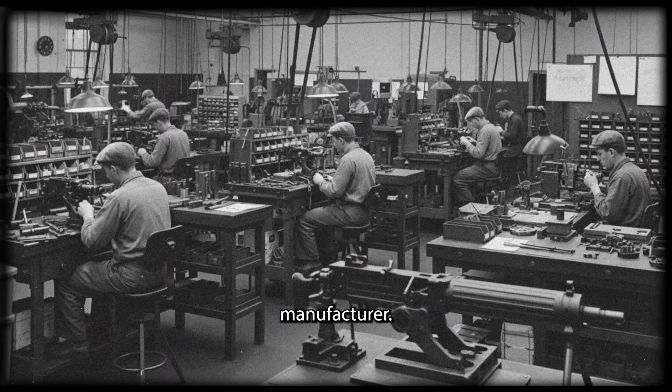What neither general knew that August was that the solution wouldn't come from a military arsenal or a traditional firearms manufacturer. It would come from a company whose engineers spent their days designing refrigerators and freezers, not weapons of war. The breakthrough was about to emerge from the most unlikely of places, Dayton, Ohio, at the Frigidaire division of General Motors.

August 1943. Frigidaire Division, General Motors, Dayton, Ohio. The Frigidaire plant in Dayton had already been transformed by war. The assembly lines that once produced refrigerators and freezers for American households now hummed with military production. Like many American manufacturers, Frigidaire had converted its civilian expertise to the war effort. The company was already manufacturing the standard M2 .50 caliber Browning machine gun, one of 4 General Motors subsidiaries producing the weapon that armed American fighters and bombers.

But the Ordnance Department wanted more than manufacturing capacity. They wanted innovation. The contract arrived in August 1943, and it was different from anything Frigidaire had received before. This wasn't simply an order to produce existing weapons. This was a development contract, a challenge to solve the problem that had defeated Springfield Armory, Colt, and High Standard. The Army needed a high-speed .50 caliber machine gun, and they were willing to try an unconventional approach.

What made this contract remarkable was what it didn't say. The Ordnance Department, frustrated by years of failed attempts to modify the existing M2 design, made a critical decision. They placed no restrictions on the number of changes Frigidaire could make to the weapon. The engineers were free to redesign, reimagine, and rebuild whatever was necessary.

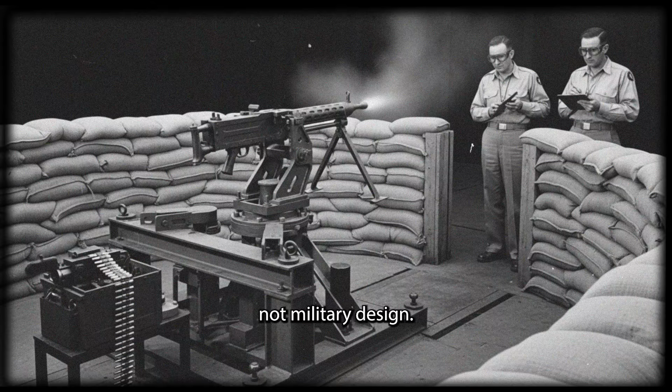For the Frigidaire engineers, this was unfamiliar territory. They were mechanical engineers, certainly, men who understood precision manufacturing, metallurgy, heat dissipation, and stress analysis. But their reference points were compressors and cooling systems, not firearms. They came from a civilian manufacturing background, not military design. They hadn't spent careers studying ballistics and recoil systems. Yet perhaps that was exactly what the project needed.

The team at Frigidaire began where traditional firearms engineers had failed. They didn't start by asking how to make the M2 fire faster. They started by studying why it failed when pushed beyond its design limits. Initial experiments focused on modifying the standard M2 with an air buffer and a redesigned backplate buffer, slightly longer than the standard model. Neither device achieved the desired result. The fundamental problem remained. The architecture of the M2 couldn't handle the increased forces.

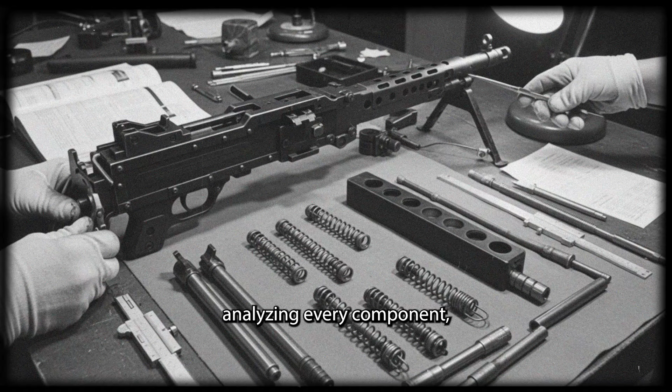So they went deeper. If the existing design couldn't be fixed, it would have to be rebuilt from the ground up. The engineers began analyzing every component, every stress point, every source of friction and heat. They approached the weapon the way they might approach a failing refrigeration system, methodically identifying failure points and redesigning around them.

By March 1944, Frigidaire had produced their first prototype, the T-25. The weapon incorporated several innovative features. The backplate buffer was completely redesigned, with springs incorporated into the design. The breech-lock depressors, previously located on the oil buffer housing, were relocated to the receiver walls. A muzzle booster was added to help increase the cyclic rate.

The gun looked promising. But when the Ordnance Department tested the T-25, it revealed the same pattern that had plagued the High Standard prototypes. The gun was relatively successful, but further development work was clearly needed. The team immediately began work on an improved version, the T-25E1.

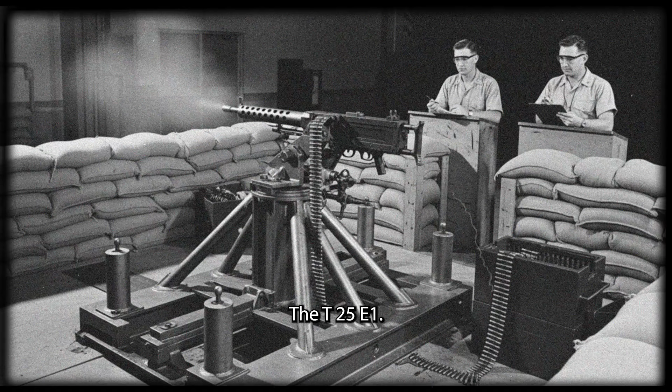On May 10, 1944, the T-25E1 underwent testing at Aberdeen Proving Ground, the Army's primary weapons testing facility. The engineers watched as their weapon was put through its paces. It didn't take long for the problems to emerge. Numerous stoppages, parts failures. The testing was stopped before completion. For a less determined team, this might have been demoralizing.

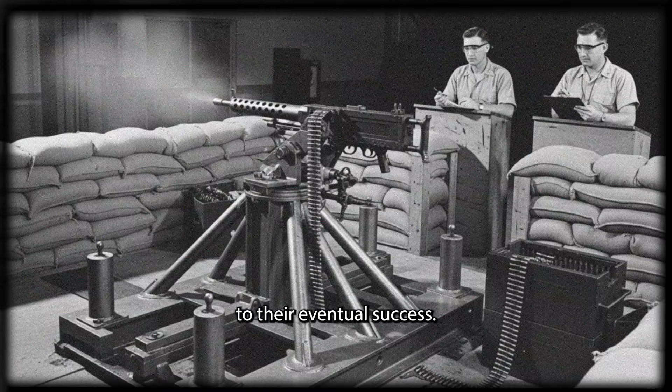They were competing against the combined expertise of America's premier military arsenals and established firearms manufacturers, and failing by the same metrics. But the Frigidaire engineers did something that would prove critical to their eventual success. They learned from everyone else's failures. The next prototype, designated T-25E2, took the best features from all the previous attempts, not just their own work, but innovations from the High Standard T-22E6 weapon as well. The engineers weren't bound by institutional pride or manufacturing traditions. They were problem solvers, and they'd take good ideas wherever they could find them.

The T-25E2 was tested in June 1944. Initial results seemed better, but functioning problems appeared immediately. After only 1,800 rounds, the test was stopped. The gun still wasn't ready. But something had changed in the approach. With each iteration, the Frigidaire team was getting closer to understanding the fundamental challenge. They weren't just trying to make an existing gun fire faster. They were creating something new, a weapon that would look like a Browning M2 from the outside, but would be almost entirely different beneath the surface.

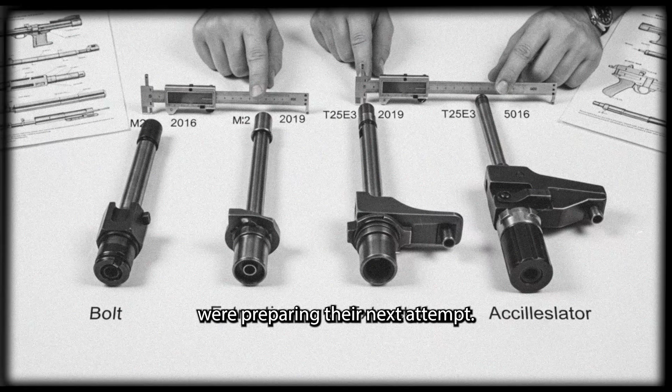By summer 1944, as Allied forces pushed inland from the Normandy beaches and American bombers continued their relentless campaign over Germany, the pressure for a solution had never been greater. The Messerschmitt jets were appearing in increasing numbers. Pilots needed that faster gun. In Dayton, the Frigidaire engineers were preparing their next attempt. They designated it the T-25E3. This time, they believed, would be different.

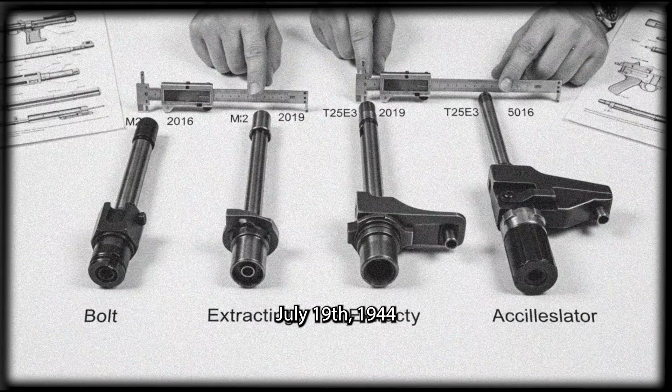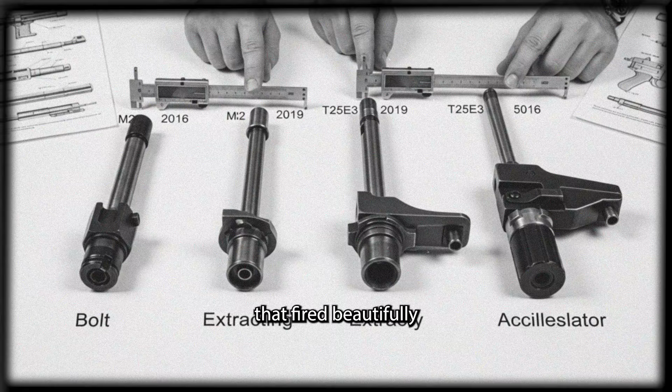July 19, 1944. Aberdeen Proving Ground, Maryland. The T-25E3 arrived for testing with little fanfare. It was another experimental high-speed machine gun, joining a long list of prototypes that had promised much and delivered disappointment. The weapons testers at Aberdeen had seen this story before. Guns that looked good on paper, that incorporated clever engineering solutions, that fired beautifully for the first few hundred rounds, and then began to shake themselves apart. But the Frigidaire engineers knew something was different this time.

The T-25E3 represented a fundamental reimagining of the Browning design. They had taken the best features from the High Standard T-22E6 prototype and combined them with their own innovations. The result was essentially a new weapon. From the exterior, it looked like a standard Browning M2. The overall dimensions were the same, the mounting points identical, critical factors for retrofitting existing aircraft. But internally, almost nothing was interchangeable with the M2. The engineering changes were comprehensive and precisely targeted at the stress points that had destroyed previous high-speed prototypes.

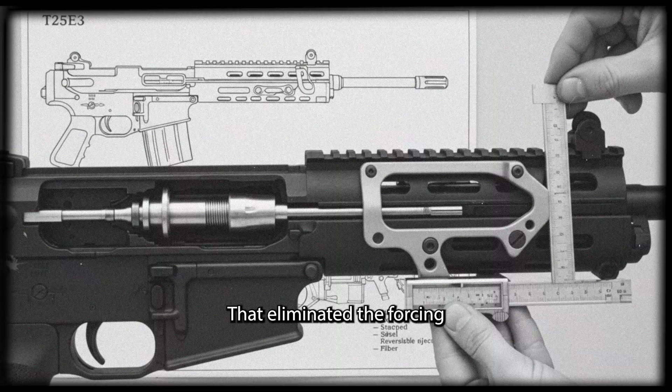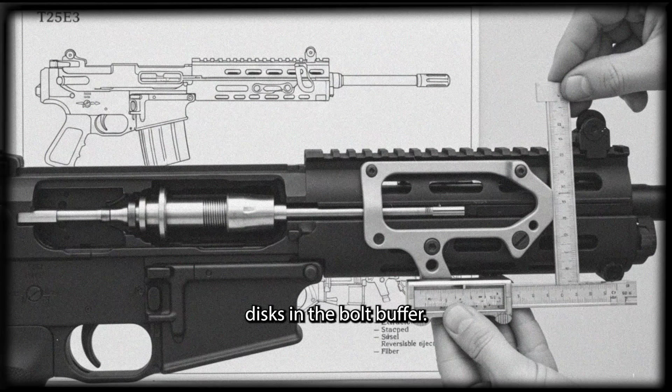The bolt had been completely redesigned using advanced metallurgy. Lighter, stronger, faster. That eliminated the forcing of the ejector between cartridges in the ammunition belt, a seemingly small change that dramatically improved reliability in cramped aircraft installations where belts could twist and bind. The accelerator mechanism had been reimagined to make more effective use of the barrel's energy, increasing the bolt's speed during the firing cycle. Where previous designs had used fiber discs in the bolt buffer, the T-25E3 employed a Belleville spring design, cupped steel washers that returned more energy to the bolt, increasing the force of its counter-recoil and contributing directly to the higher cyclical rate.

One of the most persistent problems in high-speed gun development had been backplate failures. Under the tremendous forces generated by rapid fire, the backplate at the rear of the receiver would crack and fail. The Frigidaire solution was elegant. They redesigned the backplate to clamp around the receiver, preventing the spreading of the receiver's side plates that had been causing the failures. The breech-lock depressors were rigidly mounted to the receiver's side plates by riveting, preventing the buffer body from moving and improving the stability of other components. Even the breech lock itself had been refined, with a redesigned cam surface for smoother operation.

The extractor cam was made substantially larger than that used on the M2. The top cover was redesigned to increase feed lift, incorporating a feed pawl shaped to fit the cartridge and link, along with a strengthened belt feed lever. A split belt holding pawl was added to improve ammunition feeding in confined installations. And there was the muzzle booster, a device that would help push the cyclical rate past the critical 1,000 rounds per minute threshold. The Aberdeen test officers loaded standard ammunition and standard links into the T-25E3. No special components, no hand-selected cartridges. If this gun was going to work, it had to work with the same ammunition every other weapon used.

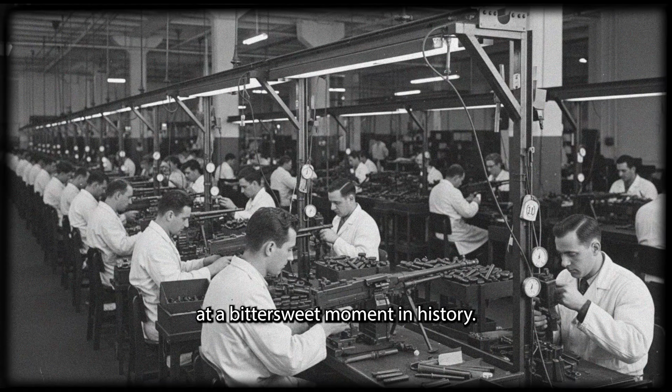But the M3 arrived at a bittersweet moment in history. Only 2,400 of the guns were procured before World War II ended in September 1945. The weapon that pilots had desperately needed in 1943, that could have changed the calculus of countless air battles over Germany and Japan, came too late to make a significant impact on the war that had driven its development.

Germany surrendered on May 8, 1945, just weeks after the M3's official adoption. Japan surrendered on August 15, following the atomic bombings of Hiroshima and Nagasaki. The war was over. The massive military production machine that had consumed American industry ground to a halt. Contracts were canceled, plants converted back to civilian production. At Frigidaire, the engineers who had solved the impossible problem returned to designing refrigerators and freezers.

The M3 might have become a historical footnote, an engineering triumph that arrived too late, except that the peace didn't last. On June 25, 1950, North Korean forces crossed the 38th parallel, invading South Korea. The United States, under UN authority, committed forces to defend South Korea. American aircraft, many of them propeller-driven fighters left over from World War II, again needed the most effective weapons available.

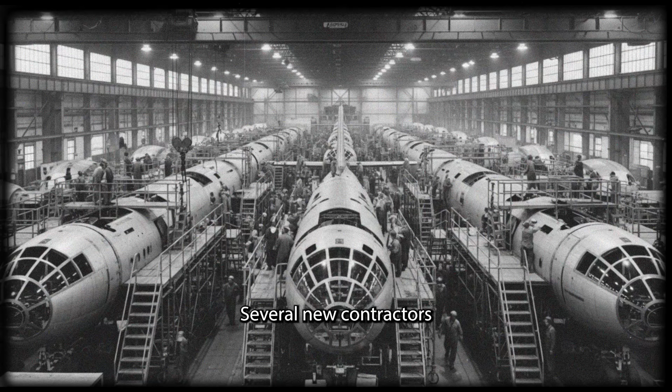The M3 machine gun was pulled from storage and put back into production. Several new contractors began manufacturing the weapon. The guns were installed on F-51 Mustangs, F4U Corsairs, and other aircraft flying combat missions over Korea. The M3 finally got its war. Pilots found that the increased rate of fire gave them a decisive advantage in the brief, violent engagements that characterized air combat over the Korean peninsula.

The weapon performed as designed, delivering the firepower that the Army Air Forces had demanded back in 1943. But the extended combat use in Korea revealed a troubling pattern. Despite all the improvements in design and metallurgy that Frigidaire had implemented, despite the careful engineering that had solved so many of the problems that plagued earlier high-speed prototypes, the M3 had a malfunction and failure rate that proved unacceptable for sustained service. The weapon was pushed beyond its limits in Korea, firing burst after burst in combat conditions far more demanding than any testing program could simulate.

Sears broke, bolts cracked, other parts failed under the relentless stress of sustained high-speed fire. The same fundamental problem that had destroyed the Colt M2E1 in 1940 and the High Standard T-22 series prototypes in 1942 and 1943 was still present, just pushed further back. The M3 had extended the boundaries of what was possible with a .50 caliber machine gun, but it hadn't eliminated the basic physics of the problem. The cartridge was simply too powerful, the forces too extreme for any mechanical system to handle indefinitely at those cyclic rates.

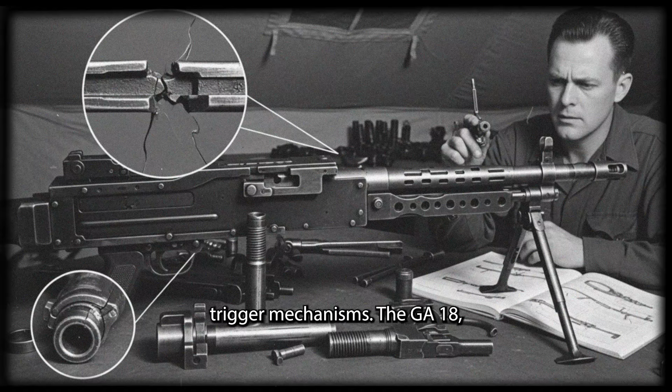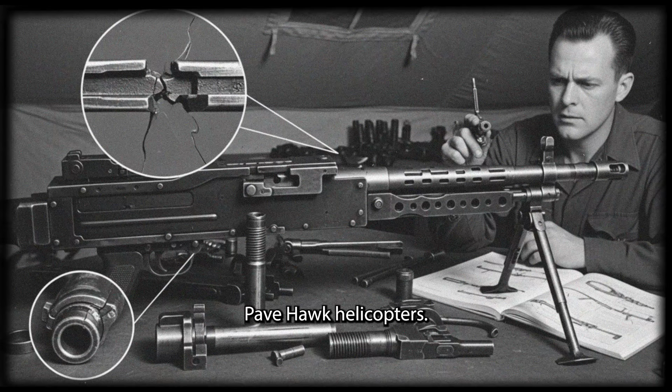The GAU-16/A featured improved trigger mechanisms. The GAU-18/A, formerly designated M218, was a lightweight variant used on Air Force MH-53J Pave Low III and HH-60 Pave Hawk helicopters. All of these were based on the standard M2 design, with cyclic rates in the 750 to 850 rounds per minute range. Reliable, proven, effective for their intended roles.

But they weren't the super-fast gun that the Frigidaire engineers had created. Then, in the late 20th century, someone looked at the old M3 design with fresh eyes and new technologies. The fundamental concept that the Frigidaire team had proven in 1944 was sound. A high-speed 50-caliber machine gun could deliver dramatically superior firepower.

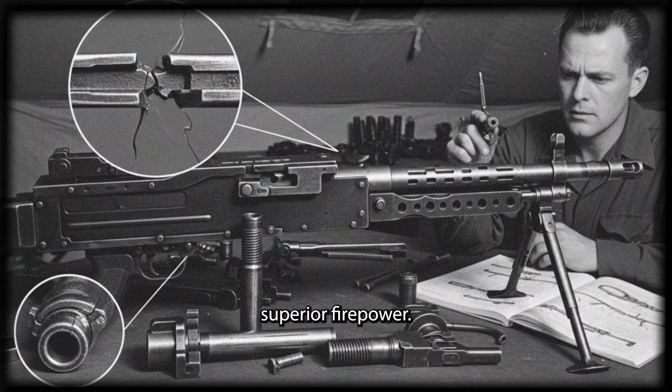The problem was materials and metallurgy. The M3 had pushed 1940s manufacturing technology to its limits and slightly beyond. But by the 1990s and early 2000s, material science had advanced considerably. High-grade alloy metals, improved heat-treating methods, and manufacturing tolerances that would have been impossible in 1944 were now standard. Engineers redesigned the M3 series using these modern capabilities.

The most obvious mechanical change was reconfiguring the weapon's operating system to fire from the open bolt position. This permitted the weapon to be fired in longer bursts without the danger of overheating and causing a cook-off, when residual heat in the chamber ignites a chambered round without the trigger being pulled. The result was the M3P model, a fixed, remote solenoid-fired version.

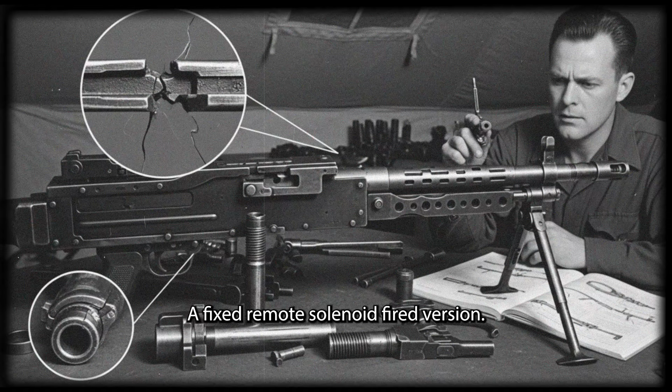The weapon measured 66.14 inches in overall length with an unmounted weight of 80.25 pounds. The barrel length was 35.2 inches. And the cyclic rate, the number that had driven the entire development program back in 1943, was 950 to 1,100 rounds per minute. Not quite the 1,250 rounds per minute of the original M3, but far faster than the standard M2, and with reliability that the 1945 version could never achieve.

The M3P was deployed on the AN/TWQ-1 Avenger air defense system and some versions of the UH-60 Black Hawk helicopters. The Avenger system used the M3P to cover the missile dead zone and engage ground targets. The machine gun was mounted on the right launch beam with its ammunition magazine fixed on the right side of the turret, carrying 250 to 400 rounds of 12.7mm ammunition.

Routine maintenance procedures included scheduled replacement of selected high-stress parts to ensure system reliability, a recognition that even with modern materials, a high-speed 50-caliber gun required careful maintenance. In 2004, another variant was adopted, the M3M flexible machine gun, designated as the GAU-21/A by the U.S. Air Force and Navy.

This version was designed for pintle soft mount applications on helicopters and fixed-wing aircraft, and could also be mounted in vehicles. The weapon measured 59.8 inches overall, weighed 78.9 pounds, and had a barrel length of 36 inches. Its maximum cyclic rate was 1,100 rounds per minute, firing from a closed bolt position. The M3M was marketed as a complete weapon system consisting of 3 parts: the weapon itself, a medium pintle head soft mount, and a cradle used to integrate the system into a vehicle or aircraft.

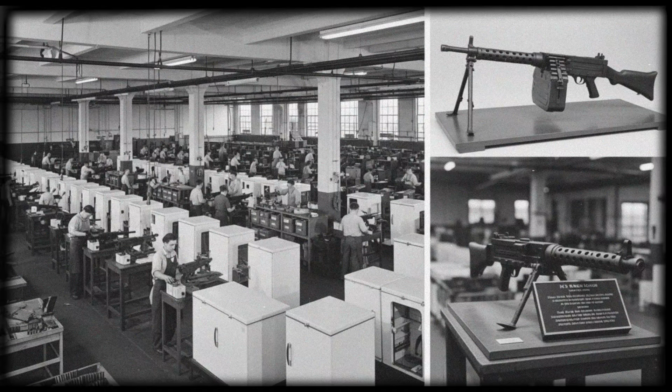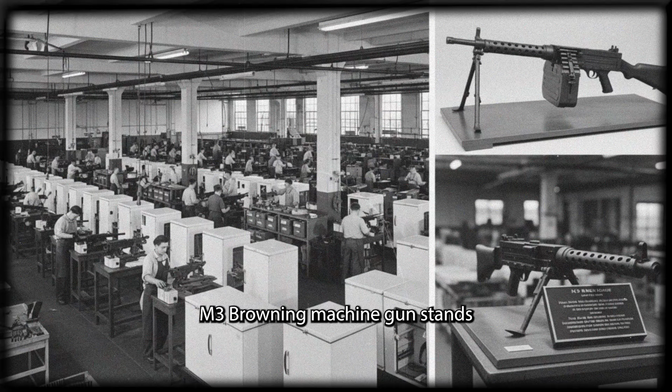The M3 Browning had traveled a long and unlikely path. Conceived in desperation during World War II, developed by refrigerator engineers, arriving too late to impact that conflict, serving briefly in Korea before being abandoned, and then resurrected decades later with modern materials to finally fulfill its original promise. The story of the M3 Browning machine gun stands as one of the most remarkable and least known engineering achievements of World War II.

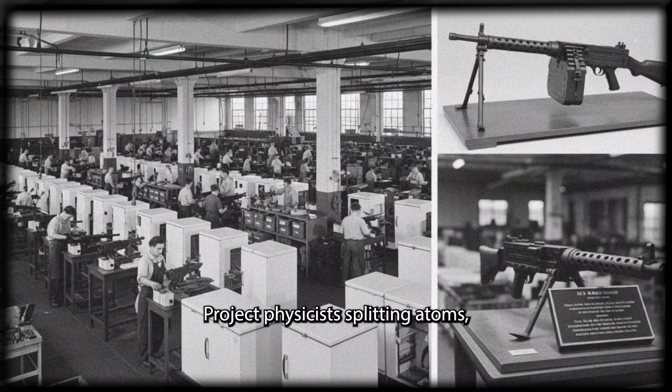It is a story without the drama of Manhattan Project physicists splitting atoms, without the public recognition given to the designers of fighter planes and bombers, without the fame that surrounded other wartime innovations. Yet it represents something equally important: the triumph of unconventional thinking over established expertise.

When the Army Air Forces sent their urgent letters to the Ordnance Department in August 1943, they were admitting failure. 5 years of development work by America's premier military arsenals had produced nothing serviceable. Springfield Armory, with its 149 years of weapons manufacturing experience, couldn't solve the problem. The Colt Company, legendary name in American firearms, had failed.

High Standard Manufacturing, with their series of T-22 prototypes incorporating increasingly sophisticated modifications, had gotten tantalizingly close, achieving the required cyclic rate, but couldn't create a weapon that wouldn't shake itself apart. The fundamental challenge seemed insurmountable.

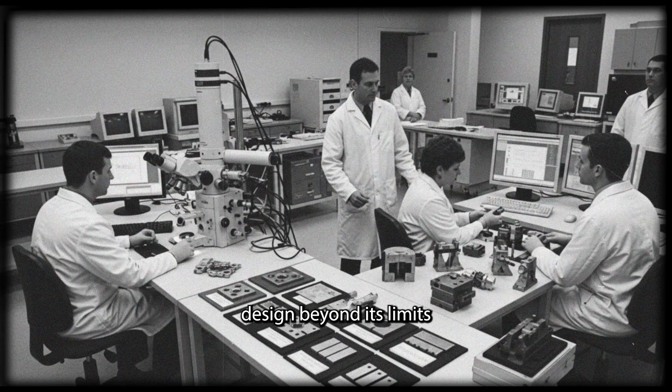The .50 caliber BMG cartridge was simply too powerful for any mechanical system to handle at speeds above 1,000 rounds per minute. Every attempt to push the Browning design beyond its limits ended the same way: broken sears, cracked bolts, shattered parts. The forces involved were too extreme, the stresses too great, the heat too intense.

Then the Frigidaire division of General Motors, a company known for refrigerators and freezers, solved it in less than a year. How did civilian engineers succeed where military weapons experts failed? The answer lies not in superior technical knowledge. The Frigidaire team didn't know more about firearms than Springfield Armory's gunsmiths. Rather, they succeeded because they weren't constrained by firearms tradition.

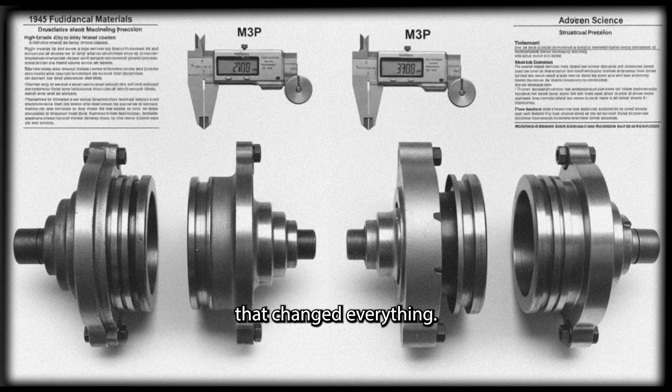They didn't approach the M2 Browning as a sacred design that needed careful, respectful modification. They approached it as a mechanical system with failure points that needed to be eliminated. When the Ordnance Department gave Frigidaire the contract in August 1943, they made one critical decision that changed everything. They placed no restrictions on the number of changes the engineers could make.

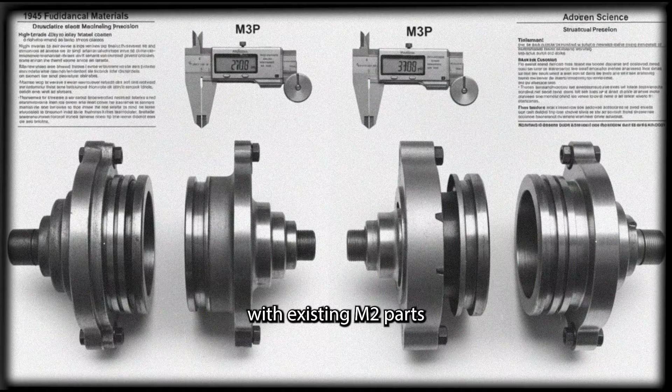Previous development efforts had tried to maintain compatibility with existing M2 parts, to minimize manufacturing disruption, to preserve the essential character of the Browning design. The Frigidaire team had no such constraints. If a component needed to be completely redesigned, they redesigned it. If advanced metallurgy could create a lighter, stronger bolt, they used it. If the backplate needed to clamp around the receiver instead of attaching in the traditional way, they made that change.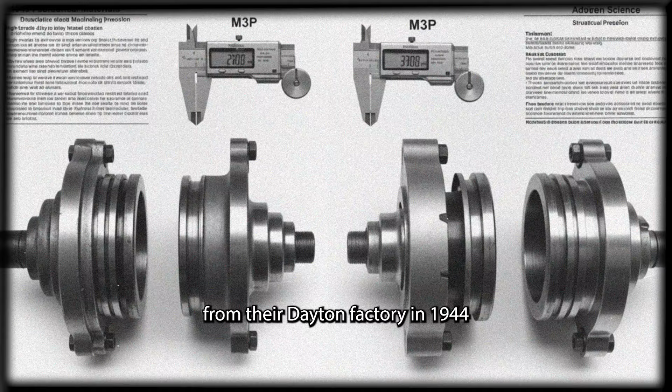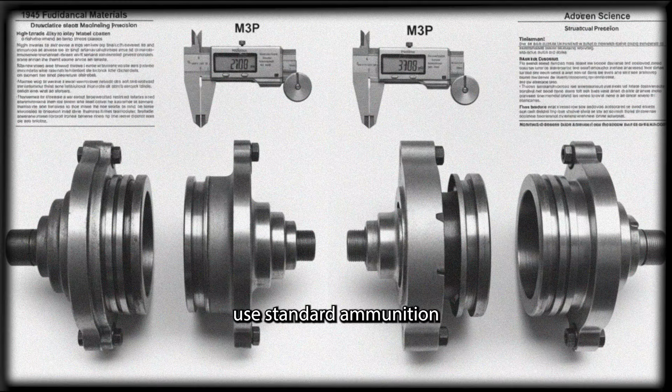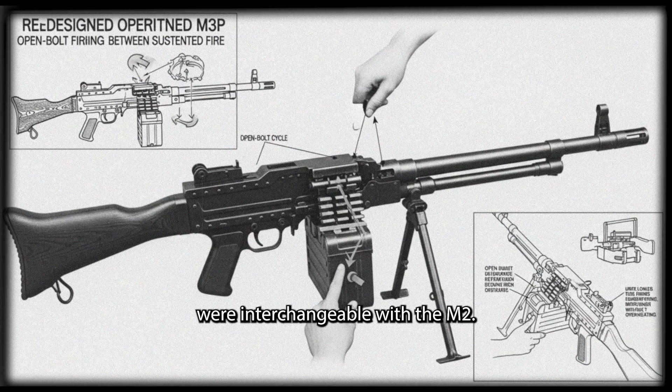The T25E3 that emerged from their Dayton factory in 1944 looked like a Browning M2 from the outside. It had to. It needed to fit existing aircraft mounts, use standard ammunition and links, integrate into established logistics and maintenance systems. But internally, it was almost entirely new. Few components were interchangeable with the M2. Every stress point had been analyzed and reinforced. Every source of friction reduced. Every heat generation point addressed.

The M3 achieved an average cyclic rate of 1,250 rounds per minute using standard ammunition and links, exactly what the Army Air Forces had demanded and what 5 years of military research had failed to deliver. The M3's service life tells the story of technology ahead of its time. Only 2,400 were produced before World War II ended, too few and too late to significantly impact the conflict that drove its creation.

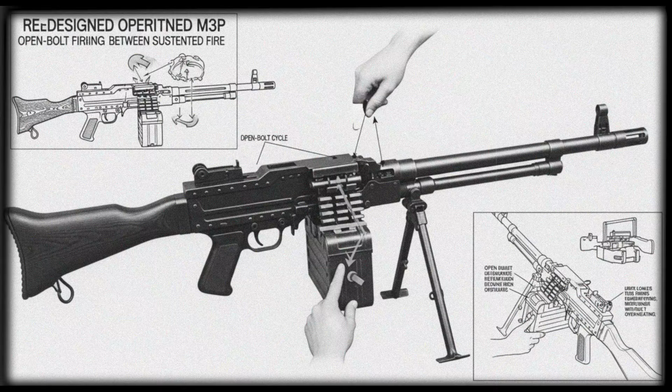It served in Korea, finally seeing the combat for which it was designed, but the sustained stress of warfare revealed that 1940s metallurgy still couldn't quite handle the punishment. The weapon was retired in the late 1950s. But the fundamental design was sound. When modern materials science caught up to the Frigidaire engineers' concept, when high-grade alloy metals and improved heat-treating methods became available, when manufacturing tolerances improved, the M3 was resurrected.

The M3P and M3M variants, adopted in the early 21st century, finally delivered both the high cyclic rate and the reliability that had been mutually exclusive in 1945. Today, variants of the M3 serve on American military helicopters and vehicles. The weapon system that began as an emergency wartime development program, that was created by engineers who normally designed household appliances, that arrived too late for the war that needed it, continues to serve 8 decades after its inception.

The .50 M2 Browning machine gun, Ma Deuce, has the honor of being the longest-serving weapon in the U.S. arsenal. It has been in continuous service since the 1920s, a tribute to John Moses Browning's genius. But the M3 represents something different, proof that even a brilliant design can be reimagined, that civilian expertise can solve military problems, and that sometimes the solution to an impossible challenge comes from the most unlikely source.